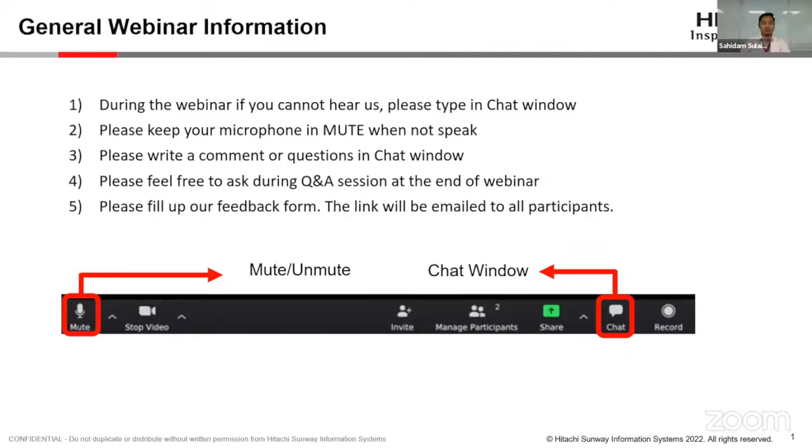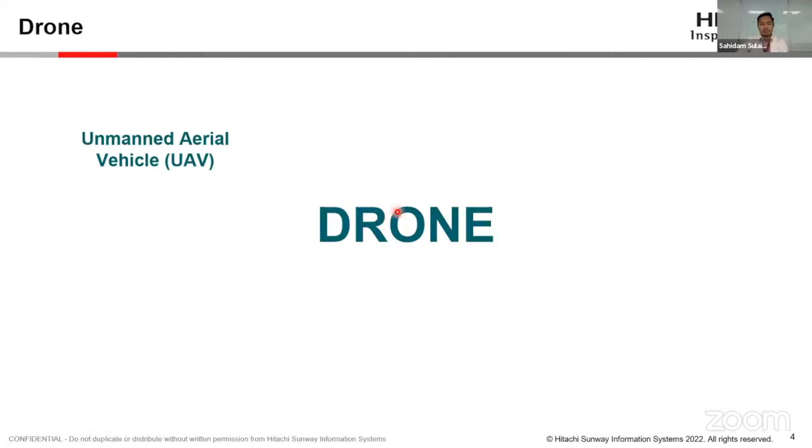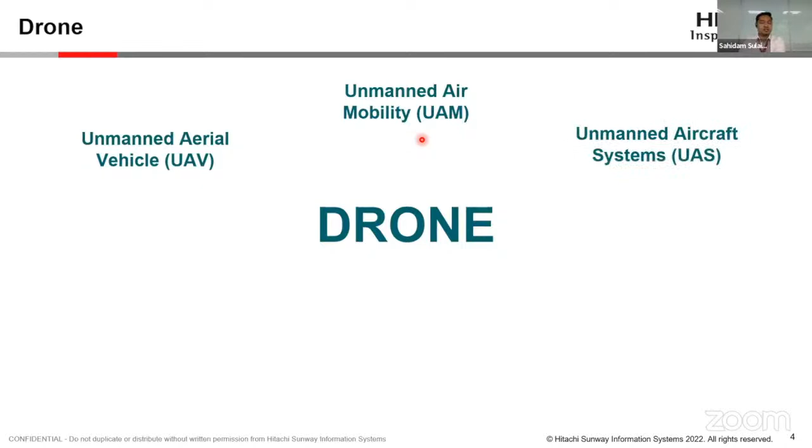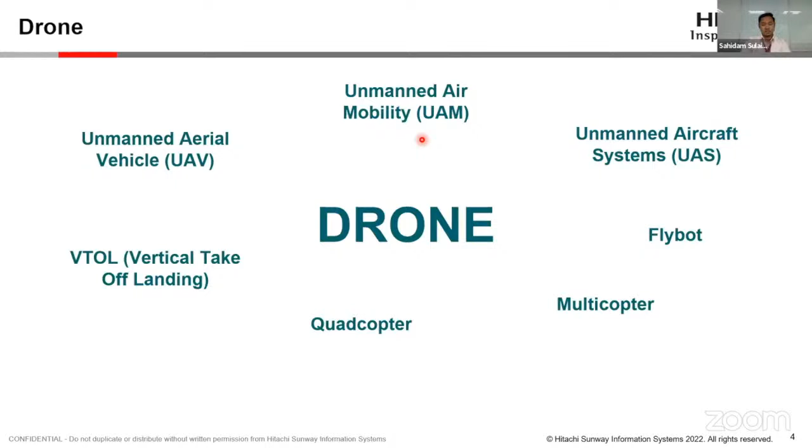Okay, firstly, when we talk about drones, it's just the normal term that people use, but they're also known as unmanned aerial vehicles, UAV, or unmanned air mobility, say when used for transportation, delivery and so on. They're also known as unmanned aircraft systems, flybots, multi-copters, quadcopters, and also VTOLs. These are standard terms representing the drone, and the actual abbreviation for drone is dynamic remotely operated navigation equipment.

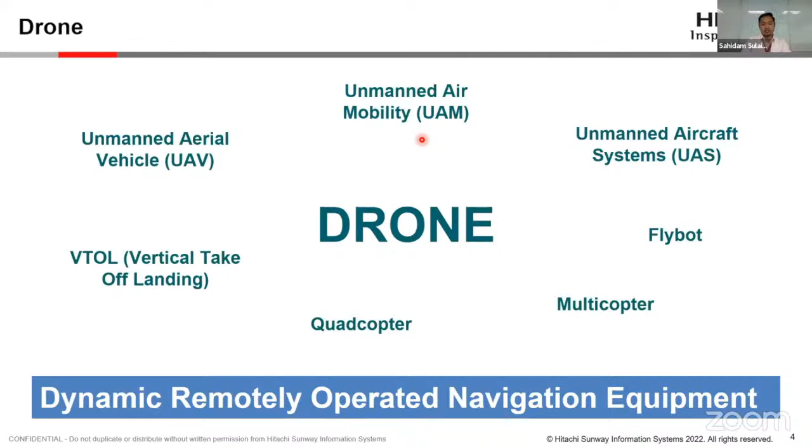So in the 90s, drones were used for military purposes, for research, surveillance, and even for filmmaking. But starting from the 2000s and moving forward, the technology improved, and drones will be used for transportation, human transportation like air taxis, passengers, and so on. So in this webinar, I try to focus on passenger drones as well as the system simulation related to that. But before that, let's see how the drone innovated throughout the years.

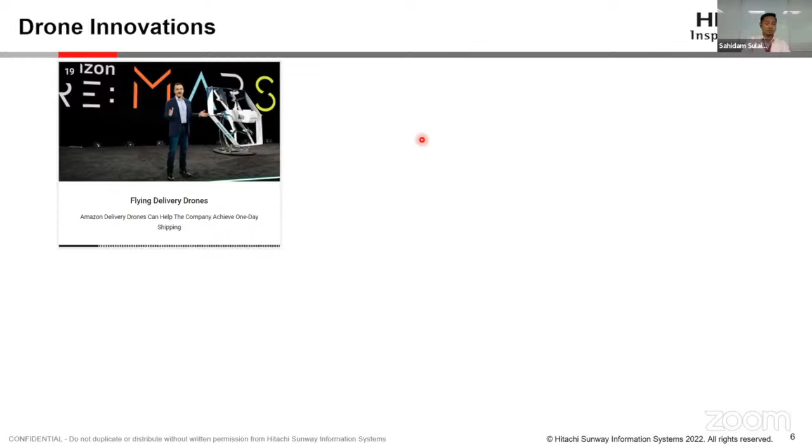So it can be used for delivery drones, which have been around a long time, like Amazon, which uses drones to deliver their products in one day. And of course, it's useful in the agricultural industry, like pesticide spraying drones, used to spray pesticide on plants. Other types of delivery drones deliver food, and they even use drones to deliver medical supplies to urban places.

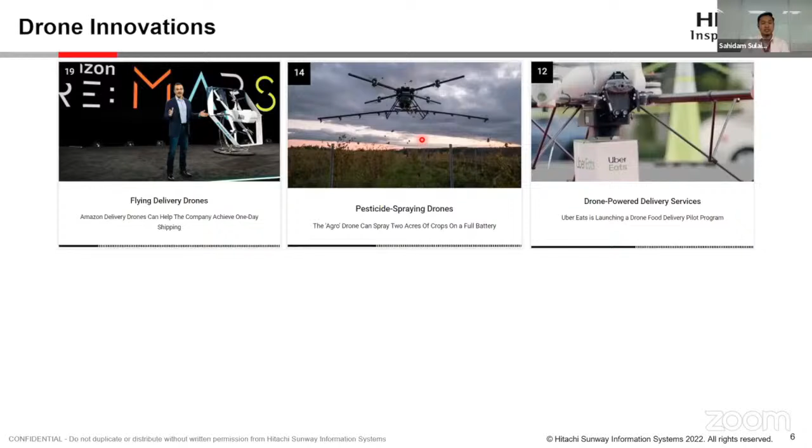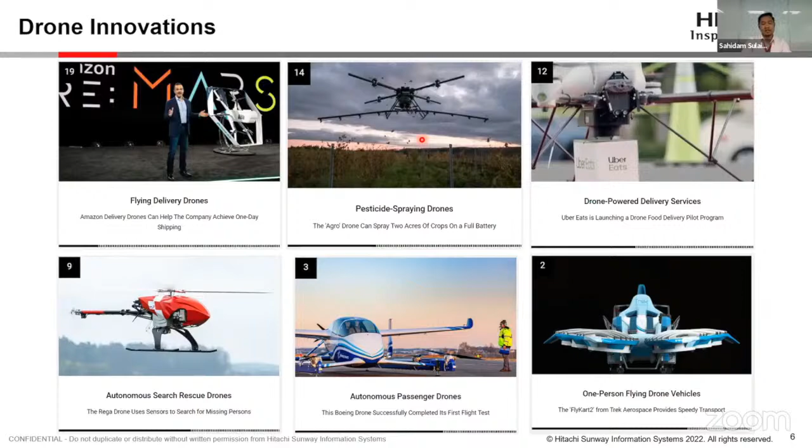And one of the innovative uses of drones is autonomous search and rescue drones. When you have earthquakes or floods where it's difficult to reach, you use a drone to find the victims so the rescue teams can go to that location. And now the trend is moving towards autonomous passenger drones or one-person flying vehicles. This is the real challenge we are facing right now: how we can validate and check the performance of our passenger drones. So we try to see how simulation will help overcome these challenges when designing or validating the performance of drones.

So as we can see now in the market, this is courtesy of Porsche Consulting, we see the trend for these passenger drones. Starting in 2025, air taxis, intra-city and also city to city. And for electric vertical takeoff and landing drones in 2035, there will be about 23,000 units, and the market at that time will be 32 billion. So in the future, they are trying to produce passenger drones. Even the certificates will start in 2025, so right now we have to start the design.

Okay, so the design should start now, because we need to cater to all types of challenges and problems, and of course we need to meet the certifications. Same as with road traffic, for air traffic you need to have air control as well. This market for passenger drones will attract a lot of capital, and from the proof of concept, we will use simulation to optimize the design of the drone for actual operation.

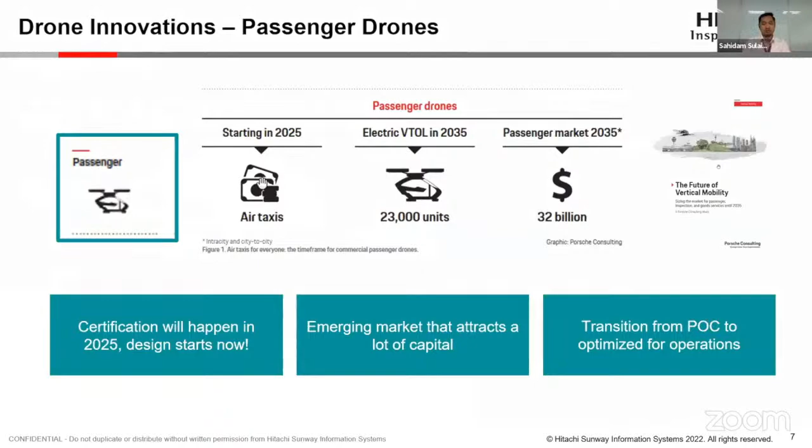Okay, so we see a few challenges that can be faced while designing these passenger drones. Of course, this relates to the design itself, where you have the propulsion system, normally electric, related to power and energy density. So if you want more power, you need a lightweight frame. These are parameters you need to consider when designing drones. The same goes for thermal or energy management, how innovative your airframe design is, and whether the flight operation is fully automated or semi-automated. And you need to make sure the design can be accepted by the community, in terms of the sound of the drones.

And of course, if these are passenger drones, you need to make sure that the end-to-end passenger experience is comfortable. They feel safe when they ride these passenger drones. So these kinds of challenges we have to cater to before we proceed to fully utilize the drone as a passenger drone. And of course, one of the important things is how we can verify our design, how we can get verification and also get certification for that.

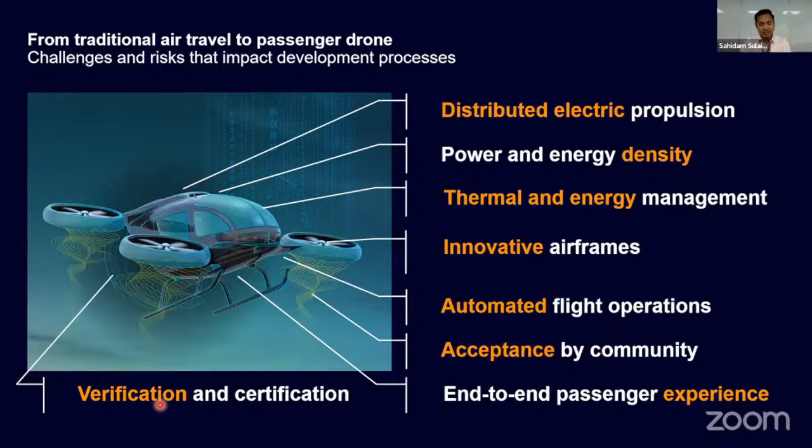Okay, even if we want to fly a drone now, we need to have drone pilot certification. If not, you have to go to jail for like 5 years. Okay, so how will simulation help to handle this? For that one, we will discuss throughout the webinar.

Okay, so here the simulation, as I can see from the poll right now, most of you guys are not really familiar with simulations. So actually the simulation is engineering simulation, where we do the simulation for the actual prototype, but this time we use computer power to make all the simulations or analysis related to the product that we want to design. So I'll just give a quick overview of this simulation, or the engineering term for this is computer-aided engineering, or CAE. I think most of you are familiar with CAD, CAM, and CAE is basically one of the portfolio for PLM products, or product lifecycle management.

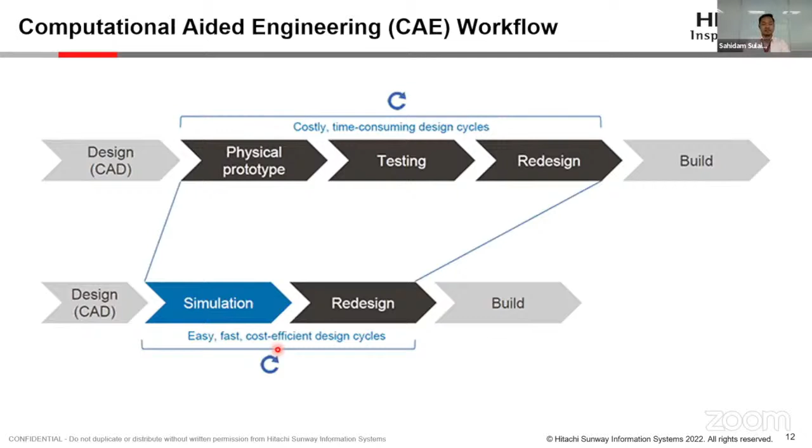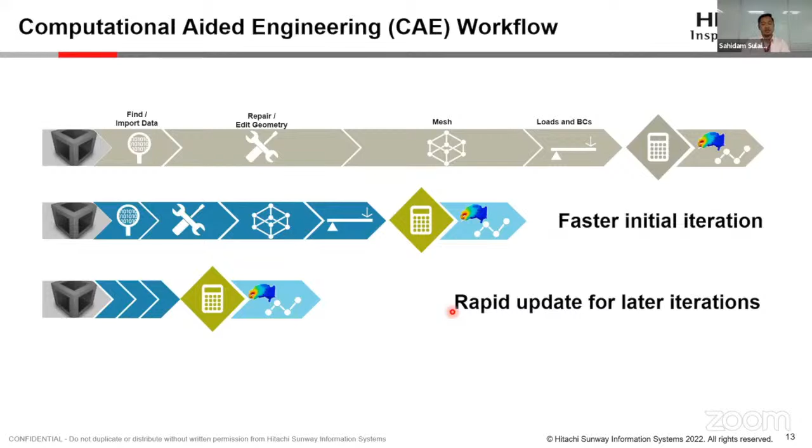Okay. So what if you have tools that can do design exploration? So this is a standard workflow. You have the workflow for CAE analysis. But if you can see from the bottom workflow here, it's a rapid update, meaning that you do design exploration in your study, because we want to innovate. Okay, we want to have innovation in our design. So we have to be in front of other competitors, and if we want to produce new components of the drones, then we need to be more advanced than them. So these tools will help to find which design can optimize the usage of the drones, which I can cover later. Okay.

So let's take a look at the first simulation that I want to share with you guys, which is aerodynamics. So when we talk about aerodynamics, it's related to the air flow, the flow velocity, the wind, and so on. So it can be internal aerodynamics or external aerodynamics. Okay, so when we focus on our topic today, which is drones, the most important component related to aerodynamics is the propulsion system.

Okay, so now the new concepts of propulsion can be either multicopters, or the common drones that we can see nowadays, quadcopter types of drones. They have 4 rotors. Okay, and then there are many drone concepts. If you search Google, you'll find more types of drones on the market. So here for this webinar, we try to focus on multicopters and also quadcopters for the simulations.

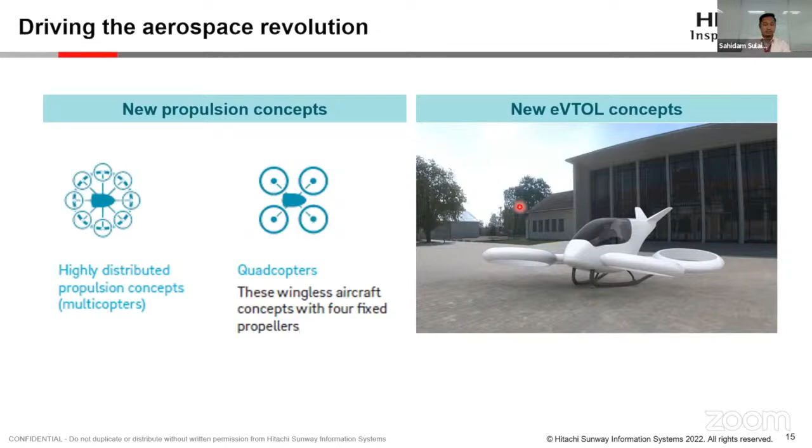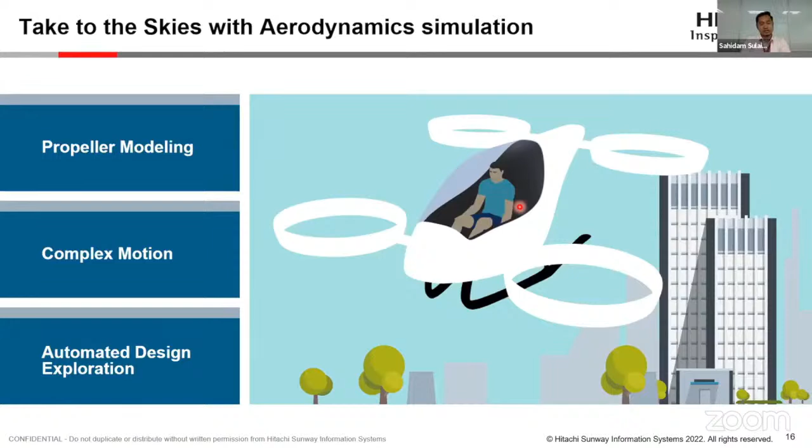Okay, so when we talk about the propeller modelings, if you have a few propellers, only 4, then you need less time to do the simulations. So depending on the number of rotors that you have, this will affect your simulation time. For example, you can see at the bottom side here, you have around 8 rotors, which means that you need to do the simulation for these 8 rotors in your analysis. Compared to the 4, maybe you have less information needed to run the analysis. So this type of drone will affect your calculation times. More rotors means more time to solve the analysis.

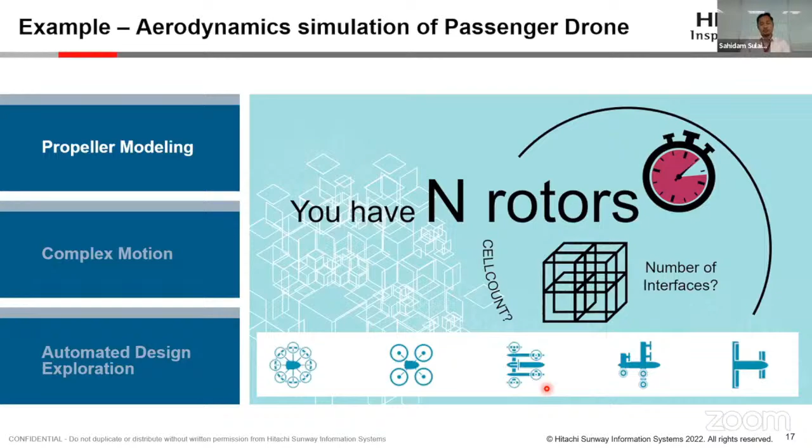Okay, so with the help of simulation, there are a few methods that you can use to study or to model the propeller. For example, in this case, we have blade element methods, and you can see from the animation how the propeller behaves, how the propeller rotates. But in actual fact, these are not modeled physically. You don't have any physical rotors. It just needs you to define the number of rotors and the parameters of the rotors, for example, the thickness and the angles of the propellers. Once you have all the information, you just key that information into the analysis, in this case a CFD analysis.

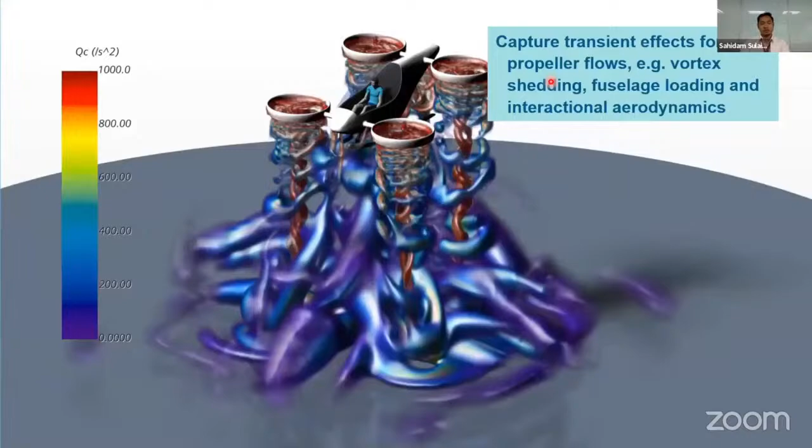So it can capture the transient effect of the flows, vortex shedding, which is important when you want to deal with the sound from the propeller movement, fuselage loadings, and also how it interacts with the aerodynamics. You can also plot the isosurface of this analysis to see the rotor positions in the simulation. So you can see here, basically, it is not the actual rotor. It's not the actual geometry. It's just based on the methods we use in the CFD tools to capture the angles, the thickness, how many blades you have for that propeller, and the diameter of the rotors. From there, you can study the best configuration of your design to have stability when you launch or land the drone.

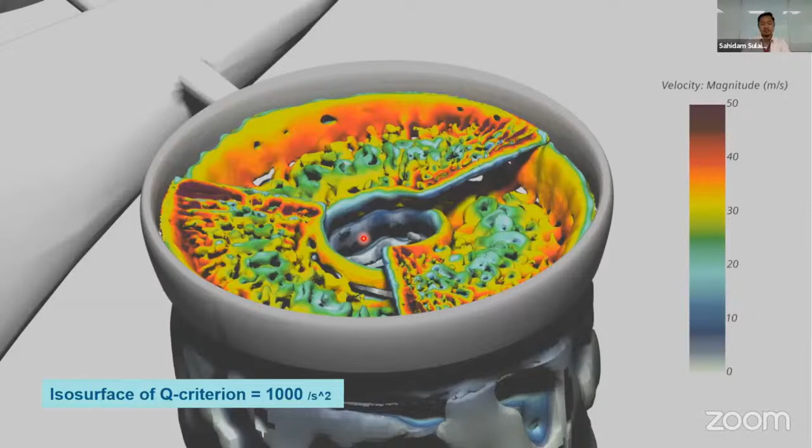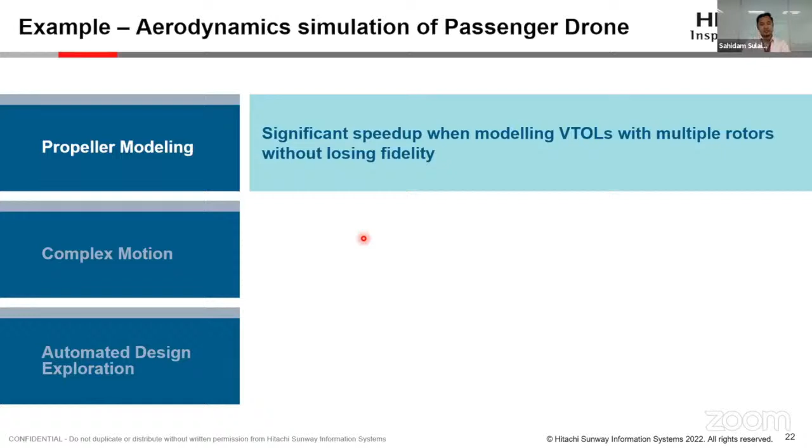So these tools will help you speed up your modeling of VTOLs with multiple rotors. You don't have to worry about how many rotors you want to use for your drones. As long as you use simulations correctly, you will gain the results without losing the accuracy of your simulation. So this is one of the important items for CFD.

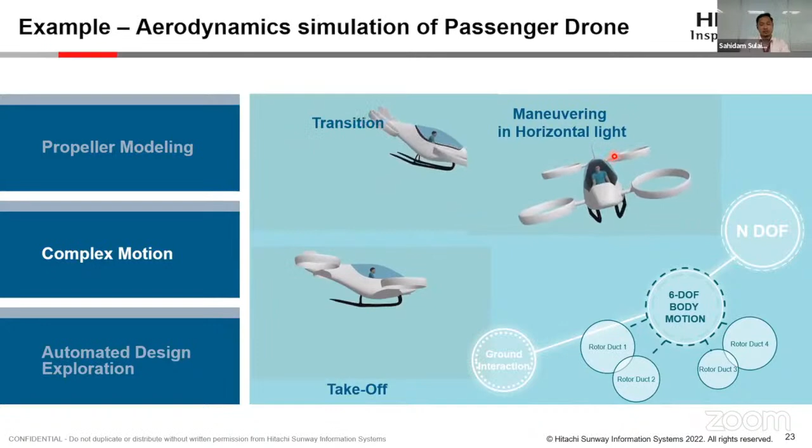But don't forget about the motion. When we talk about the aerodynamics of drones, we want to make sure how the drone behaves during takeoff, and how it transitions from vertical motion into horizontal motion. And of course, you want to know how the maneuvering system works when you start to maneuver your drone. This also can be done inside the CFD tools. So you can see from here the takeoff, the transition from vertical to horizontal, and then the maneuvering in the horizontal.

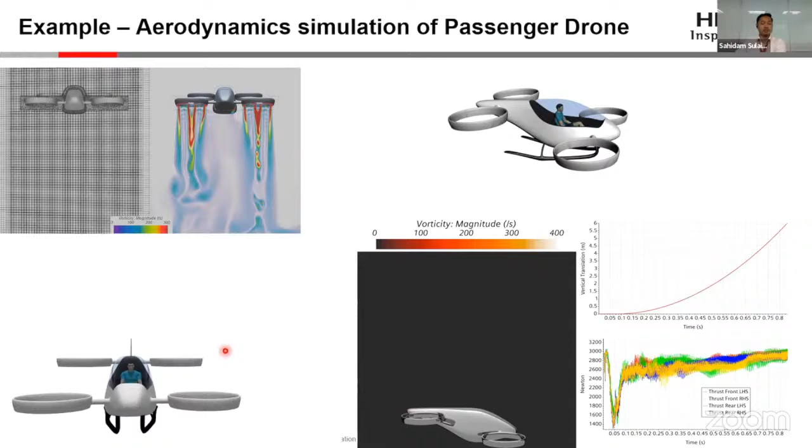If we look in detail at the simulation, this one is the vertical takeoff. You can see the vorticity magnitude, the streamlines, and from the results or the contours, you can control the best configuration that can make the drone stable. Same thing for the maneuvering, you have more control over the flow around your propellers, so you can optimize your design. And this is the transition from vertical to horizontal.

When you are talking about simulation, this is related to the meshing, the number of elements. So you can see here for these 4 rotors, you already use quite a lot of elements. Imagine if you have 18 rotors, like Volocopter, which has 18 rotors. If you want to simulate it using a standard CFD process, it can take up to a week or even more to complete the analysis. That's why some software has tools that can simplify the methodology in performing the CFD analysis. Same thing, you can see the plot, the contours, the animation. You can also gather the information that you need.

At the bottom right corner, you can see the thrust information from each of the propellers. You can plot this thrust and make sure you have the optimum thrust to ensure your drone can take off vertically. So these are the important information that you need from the CFD analysis.

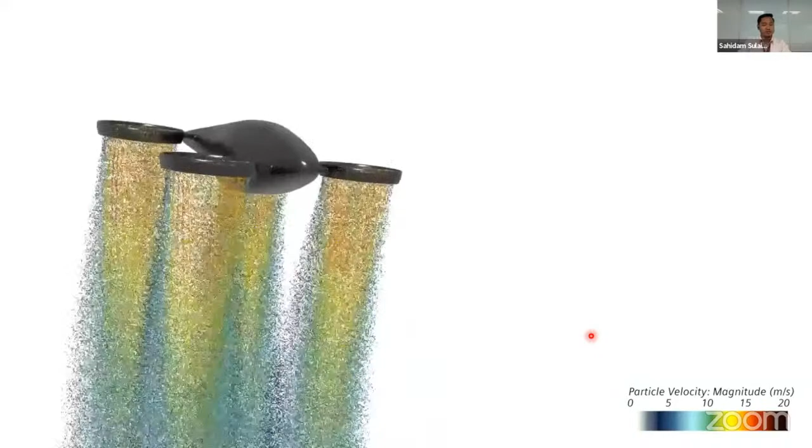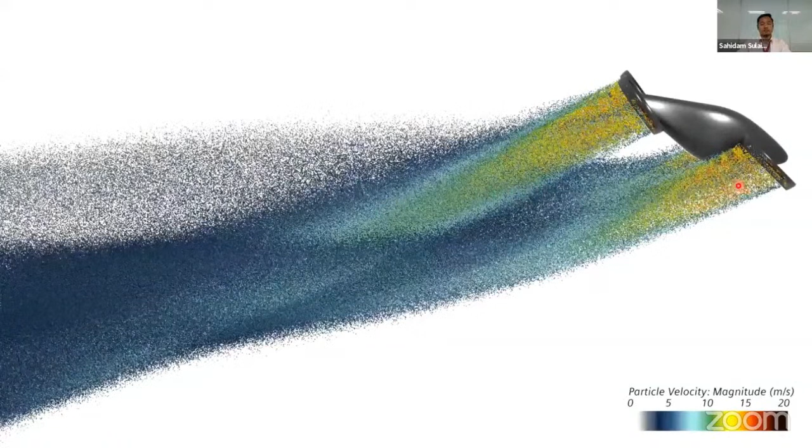Once you combine everything for the motion, you can see the takeoff, the transition between verticals and horizontals, and if you do maneuverings, you can see how the flow behaves around the propellers. So this is one of the post-processing visuals that you can see from the CFD analysis.

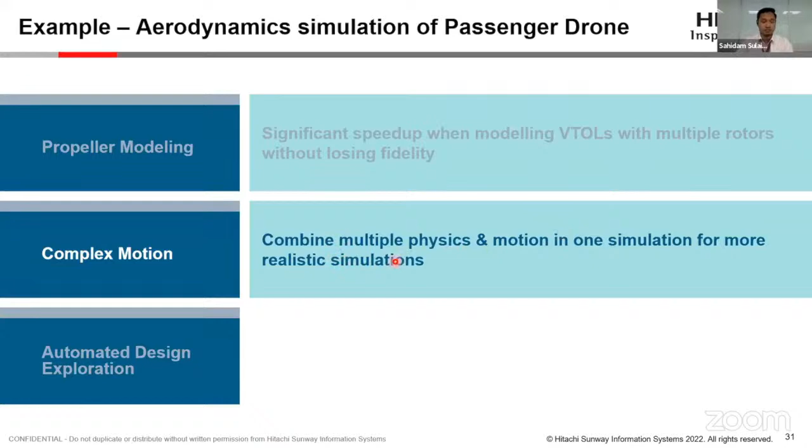For the complex motion, it can handle multiple physics because, as you saw from the previous slide, you have the CFD part and then the motion part. So this is considered multi-physics. You can see how the motion affects the flow, and how the flow affects the motion. These are more realistic simulations nowadays, and many software have these tools.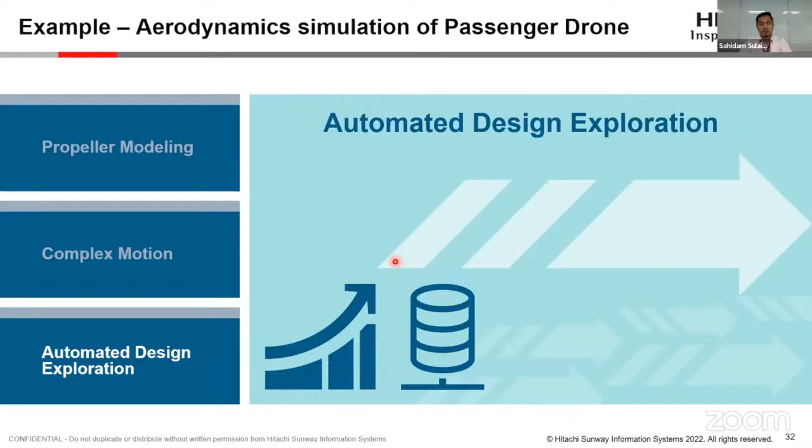The most important part when you want to be innovative in drone design is having design exploration tools. This will help you find the best prototype, the best configuration of your drones.

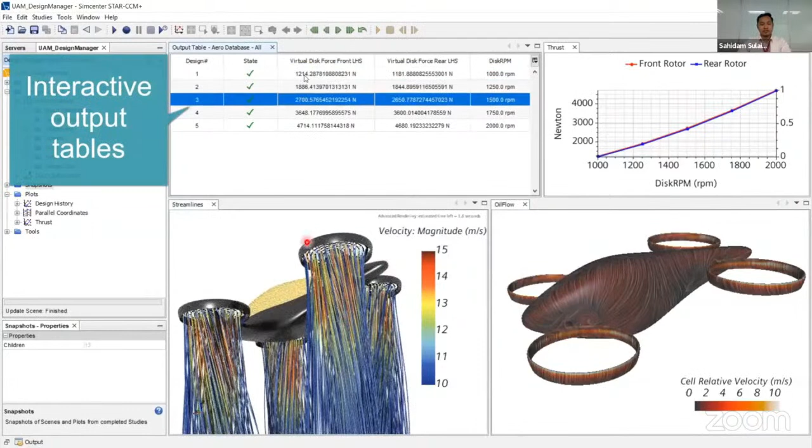For example, in this case we have different parameters that we want to study, such as different rotor parameters: the diameters, the blade numbers, the angles. Using these design explorations, you can find which combination is the best with the minimum thrust, or even minimum number of blades that you can study from the analysis. It depends on how many parameters you define.

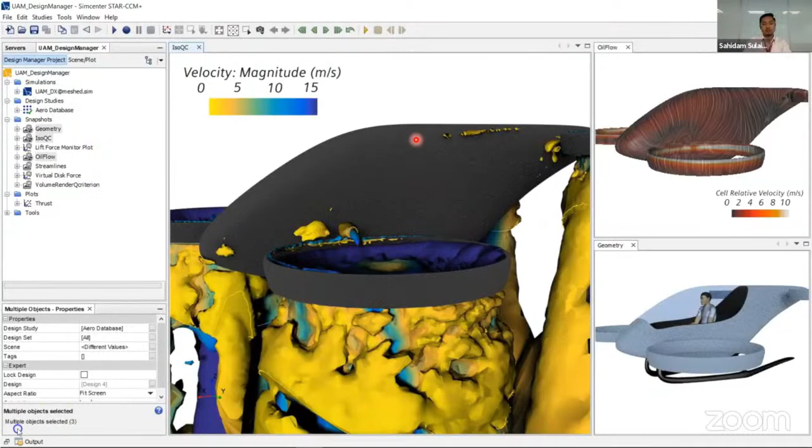It will take time sometimes to solve, but it's worth it compared to the traditional way of doing things, where you need to build physical prototypes. Each time you change a design parameter, you'd need to build another physical prototype, which is costly. Using these simulation tools, you can study as many designs as you want and display the results. Once you find the final best design, then you can proceed to produce the physical prototype.

That was talking about a few parameters, but let's say you want to move further for better designs. You can use the design exploration tools. For example, here you can see there are 9 variables for the drones, like the NACA profile thickness, the propeller diameter, RPM, the angles, height, and so on.

The tools will help you find, based on the objective you want to achieve from the simulation, the best candidates using design exploration. You can see from the animation here how different configurations give different plots. From there you can study what the most important parameters are that you need to change before you get the results you want.

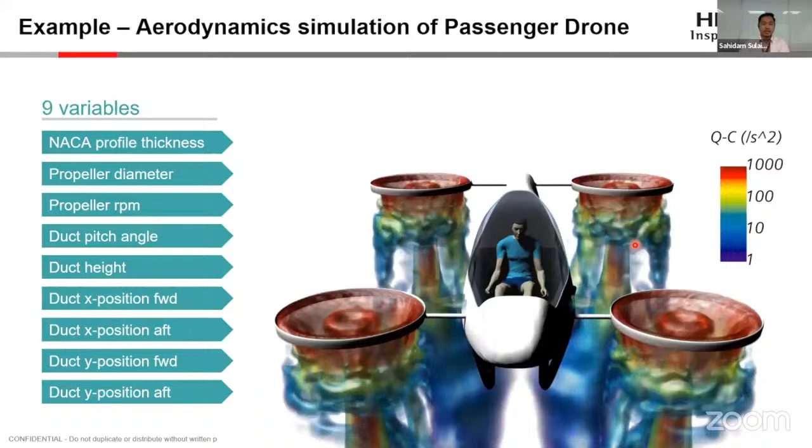So here are the optimization tools that software have. Now we are using Star-CCM, one of the CFD tools. Basically you can set your goals; let's say you want to minimize the power for the thrust.

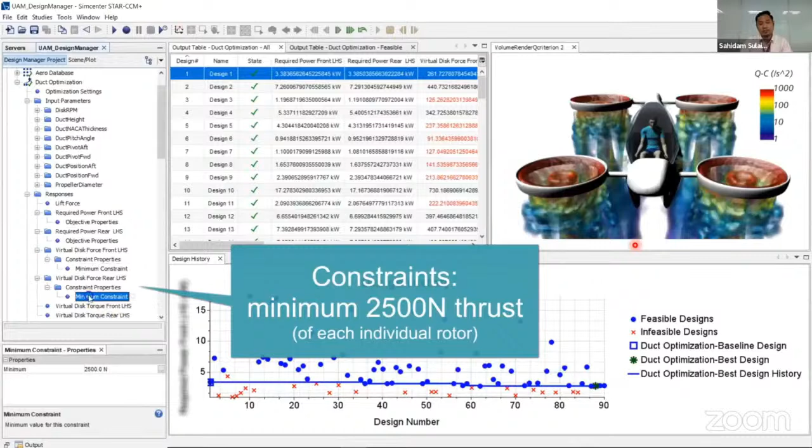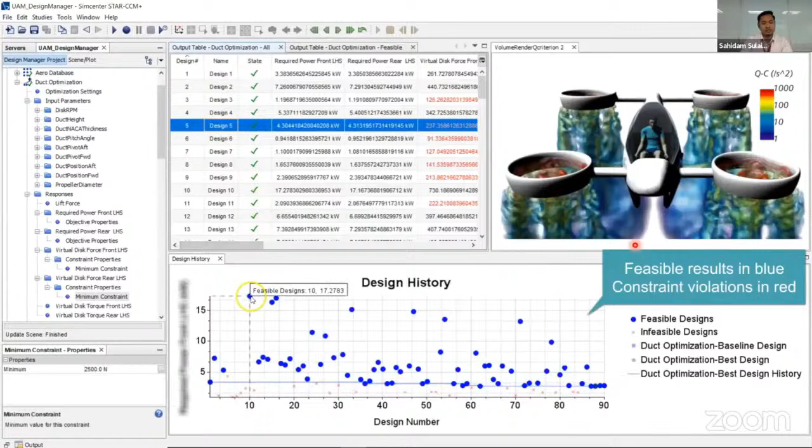You need to make sure each of the rotors have a minimum thrust, like 2500 Newtons of thrust. Using these exploration tools, it will run all the parameters in the background, and you can see a lot of feasible designs. Feasible design means a design that meets all the requirements, and unfeasible means a design that fails a certain criteria. From here you can choose the best design.

So here is design number 88, and then you can study the parallel coordinates, plot the contours, and plot the cell relative velocity. This tool will help you be innovative—you just choose the best design instead of producing all the prototypes for each design. You can see all the variables and which variables affect the thrust the most.

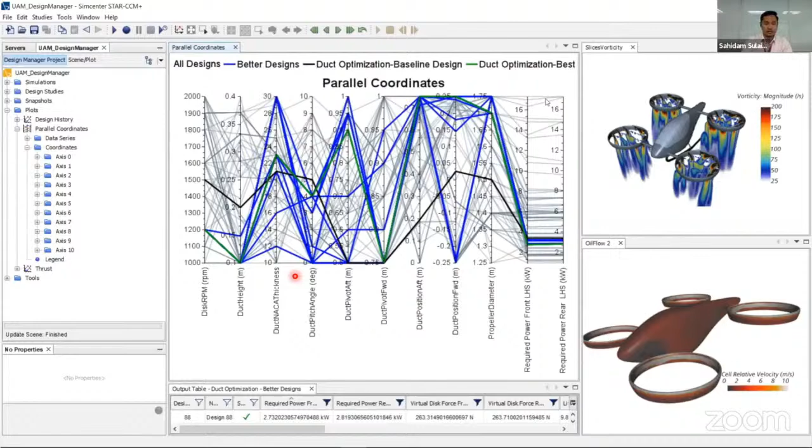This tool will help you be innovative. The design exploration will save money, and you can analyze a few thousand designs in one shot. You don't need to make another design to achieve that.

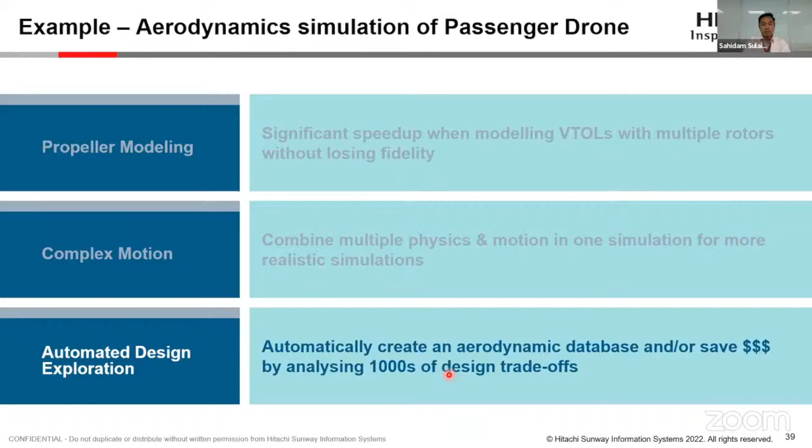So that covers the aerodynamics part. As I mentioned, another important simulation type that drones need to cover is acoustics. Once we mention acoustics, based on the definition it's the study of compressional waves, which in layman's terms is related to sound.

Okay, it's related to the sound. The sources of the sound can be from vibrating bodies, or even coming from air turbulence. If you can see from this blade here, the rotation of the part will give the sounds. And then the propagation of that sound may be through the air, through the structures, or a mix of both.

And then here the receiver is basically, in terms, we call it a microphone, or it's actually our ear - how we receive the sound from the sources.

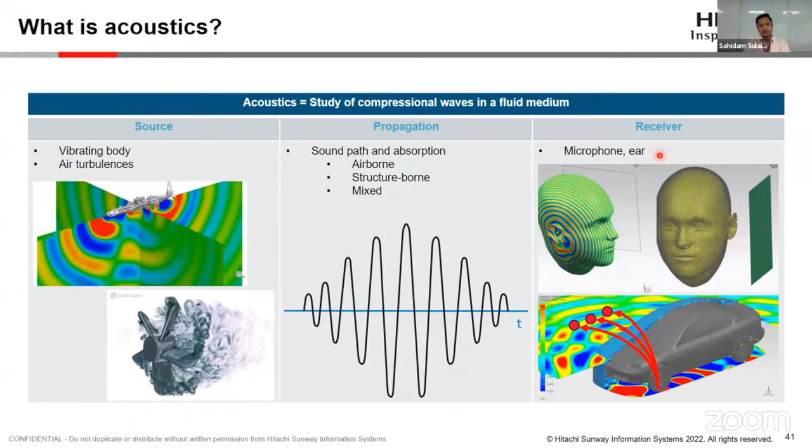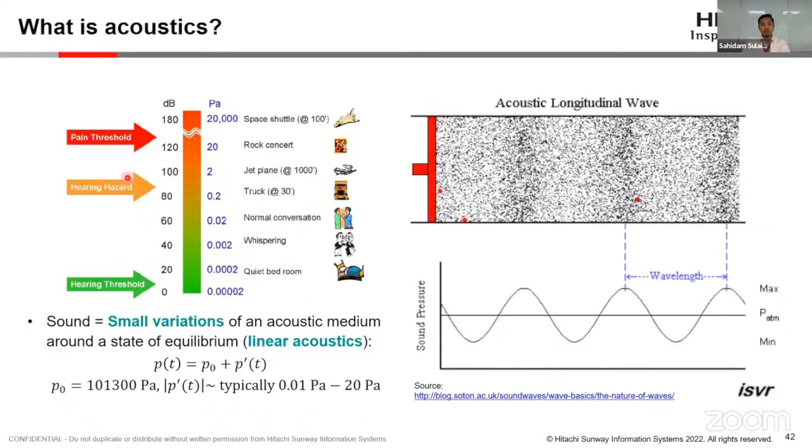So why acoustic is important in drone design is that you can control your sound when the drone does deliveries, or even for the passenger inside - you can know how many decibels they can take. That's why you need simulation tools to study the acoustics of the drones.

Just a quick information sharing on how the acoustic analysis can be done. You basically need to model the parts, the drone part - this is an example of a delivery drone. As you can see, the drone itself has 4 propellers. In this case, the propeller is not designed because some of the software has tools to generate the profile of the propellers virtually.

If you can see from the bottom side here, this is the CFD analysis of the propellers. We will use the results from these propellers and transfer them into the structure part. Once we have all the information together, we can do the acoustic analysis. So we can see the propeller is rotating, even though we didn't have the actual propeller. This is how the simulation will help you achieve design innovation.

Let's say, from the design itself, you can plot the acoustic pressure, the directivity plot as well.

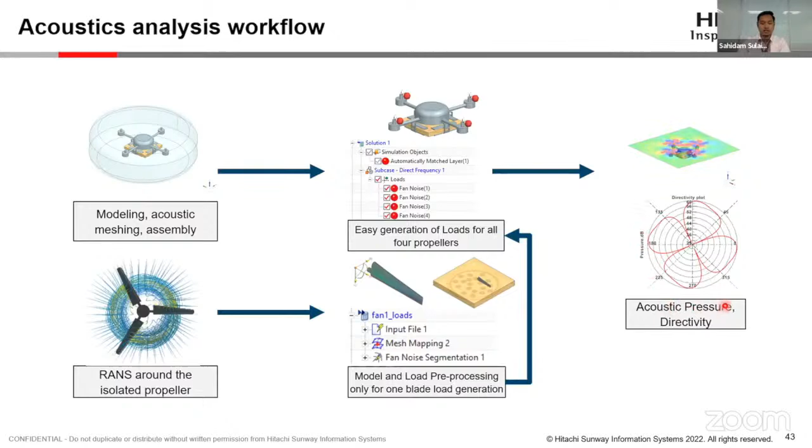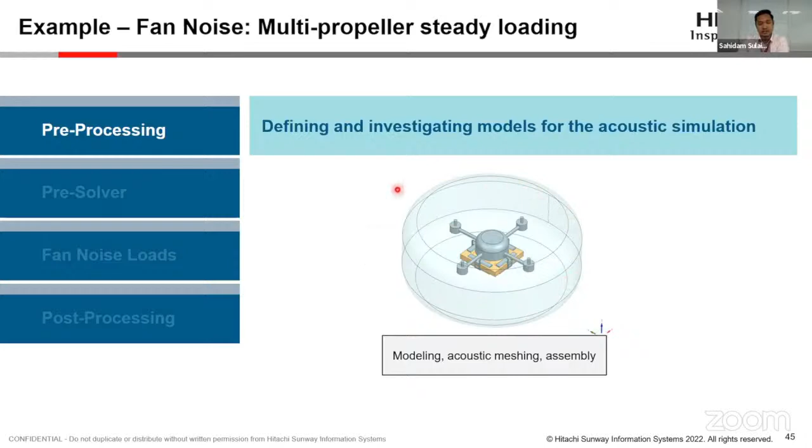In detail for this part, let me run through it quickly. You have pre-processing where you need to define the part itself - the drone, and then you have this big cylinder here. This is for the acoustic area, meaning you want to have the propagation from the propeller to the location you want to check or measure. So you need this cylinder part here as your acoustic volume.

And then of course you need the information of the blades - for example, you run CFD simulations, or you can get actual data from real testing. Once you have that data, you can import it into the simulation tools, especially for acoustics, and do the mapping. Basically, the software will convert the pressure from the CFD analysis into force data, which can be read by either acoustic or structural analysis - both are possible.

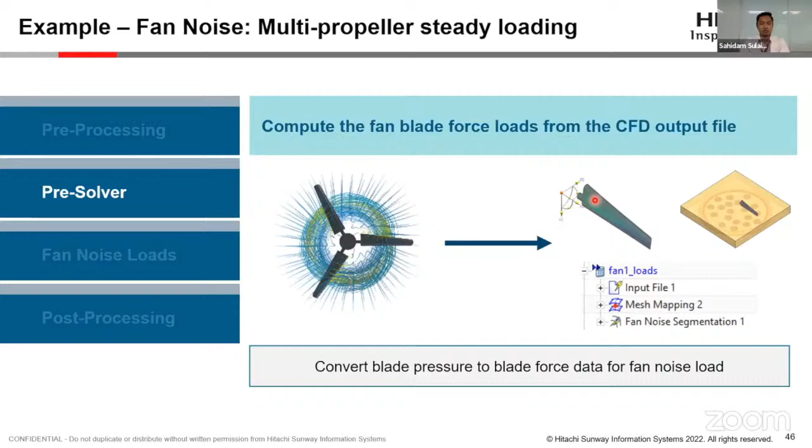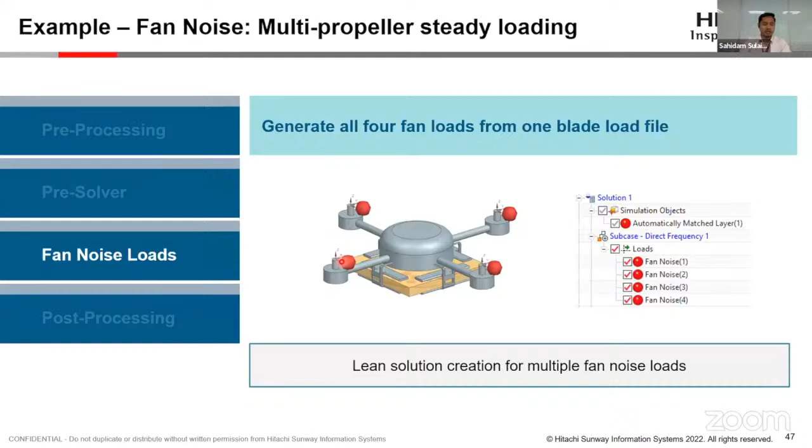The noise load that you get from the CFD or actual testing, you can map into each position - so you don't have to have the actual propeller, you just need that information. Once you complete the analysis, you can get this type of results.

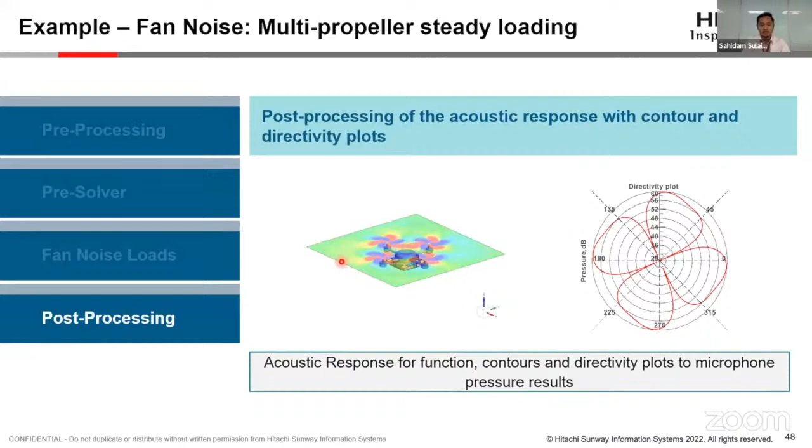Let's see a quick video on how we can view the results of the acoustics. Every software has post-processing tools where we want to see the plot of the results. Here we have groups of the plane, which is the microphone plane - this is the level we want to measure. If you want to measure in a different location, you need to generate another plane.

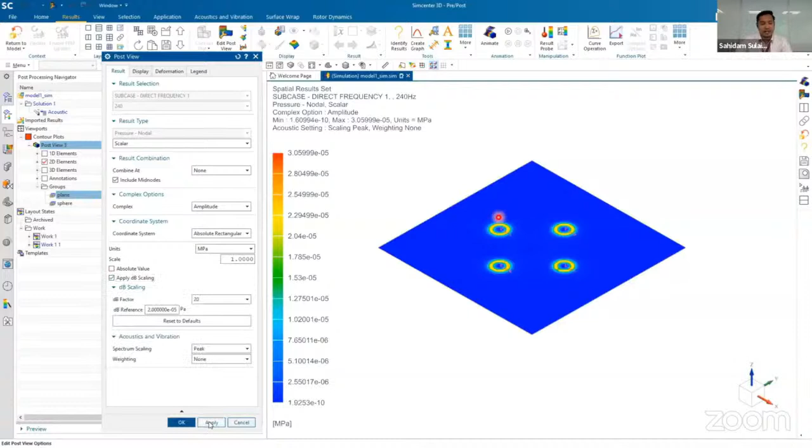And then here we can put a scaling based on the decibel, and you can play the animation as well to see whether it's correct. So you have all the results, the decibels, and you can play around with the post-processing tools to plot how the animation of the products looks, the acoustic levels. For each of these acoustic results or plots, you can compare with the contour here.

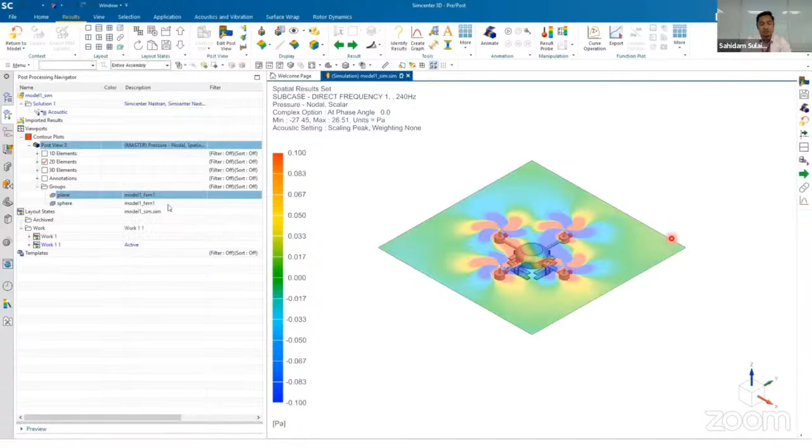So you have this type of rotation around each of the propellers, and then you see the location of how the noise is distributed from the sources, and you want to make sure that each location maintains under the threshold. So this is how simulation helps in designing acoustic performance.

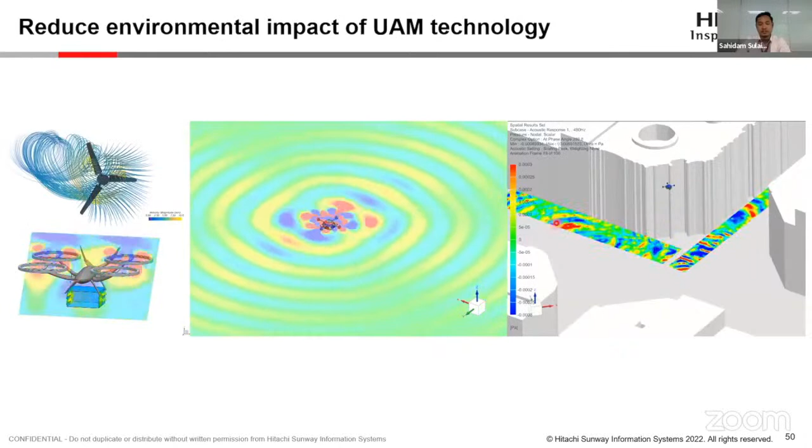If you want to go further, you can do ray acoustic simulation. This is an example done by Brazil, where they have delivery drones and want to make sure the sound pressure level doesn't affect the ear levels of passers-by. So this can be done as well.

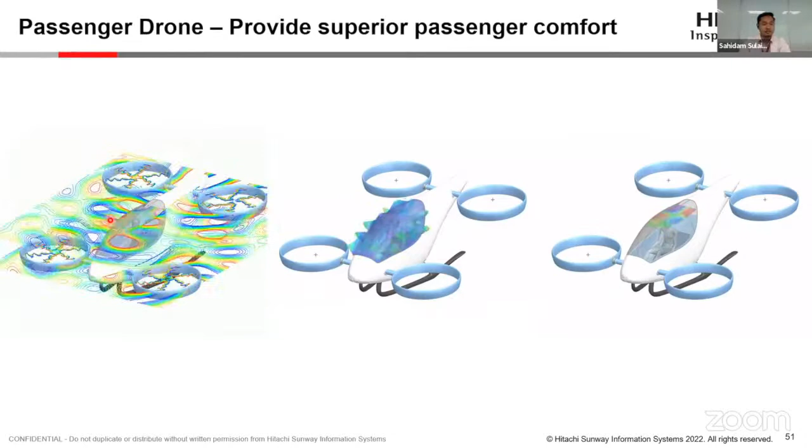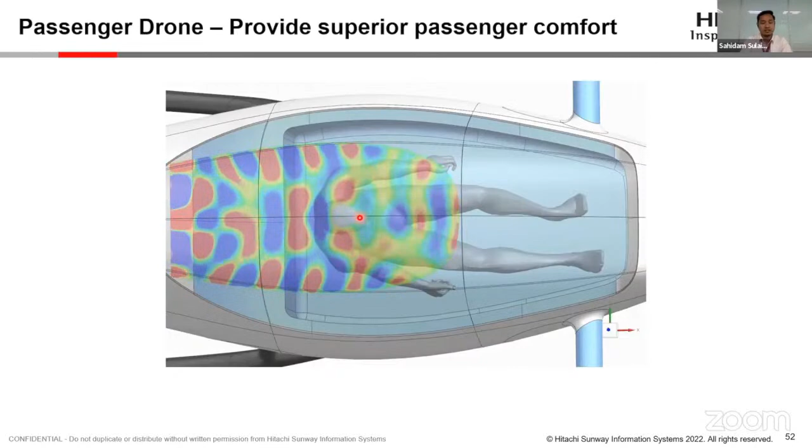And earlier we talked about passenger drones, right? So we have this information as well. You can plot the acoustics around the passenger itself, and see how the sound wave propagates from the propeller to the ear of the passengers. This helps you decide how to control the propeller and what design is best to make the passenger comfortable inside their compartment.

Finally, I'll share with you about system simulation. It's a bit different from the first two simulations I talked about earlier, aerodynamics and acoustics, which are more 3D types of simulation. System simulation is a 1D type, which is also important when you want to verify your drone design. Before that, let's understand what a system is.

A system is basically a group of multi-domain or multi-physics elements. If you remember, we talked about domains: electrical domain, control domain, hydraulics, pneumatics, and thermals. Same thing for physics, we have structural dynamics, thermal physics. Once we have all of this together, it becomes a system.

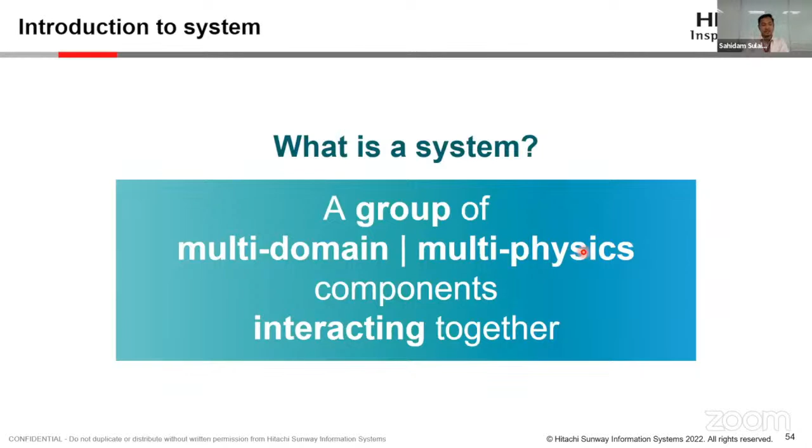Now, if you look at simulation tools around the world, how do you want to connect a 3D simulation, how do you want to connect the electrical part into the CFD? That will be a big challenge to the analysts, to the companies. That's why we call this system simulation, to combine all the things together.

Just take a look at the hybrid vehicle example. To produce this hybrid vehicle, you have to have the control system connected to the electrical system, then you have hydraulics in terms of the absorber, a mechanical system, a thermal system. All of this needs to be connected to ensure the performance of the hybrid vehicle.

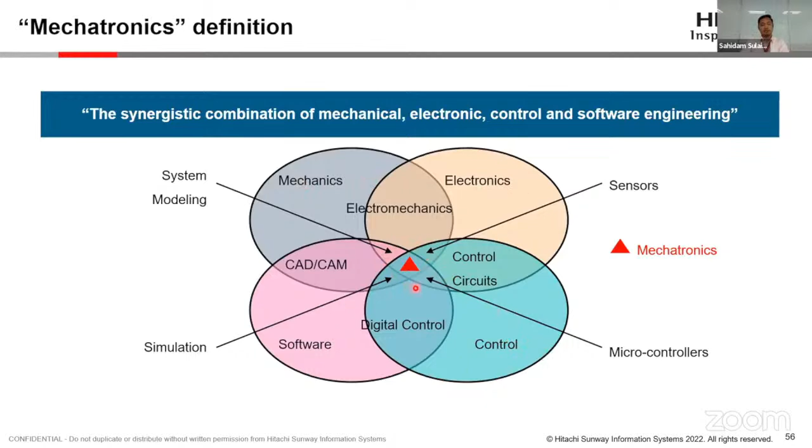The combination of all this is called mechatronics. If you look at the graphic here, it consists of software, mechanics, electronics, and controls. The thing at the center is the mechatronics we want to discuss related to drones. A quadcopter drone is the perfect example of a mechatronic system because it relates to electrical, mechanical, as well as aerodynamics.

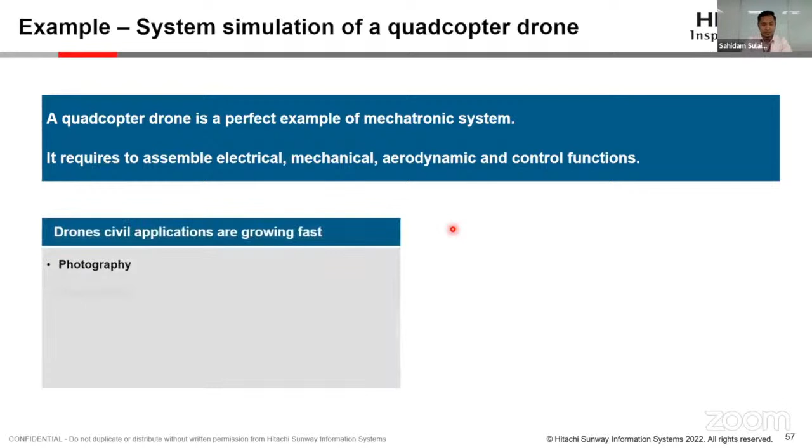So these are some applications for drones, and what's the effect of the parameters we define for this drone system on our flight times. What's the stability? What's the max payload that the drone can satisfy when you design this type of drone?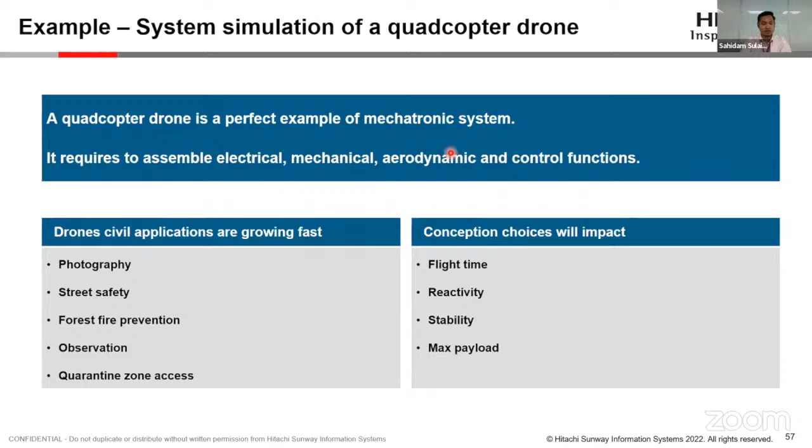So these are examples of the drone system. You have a control system for the electronic speed controls, the controller, electronics and electricals. You have electromagnetics, antenna, the communication between the drone and the pilot, and also the mechanical and aerodynamics of the propellers. So it is a system that you need to make sure is working perfectly before you launch.

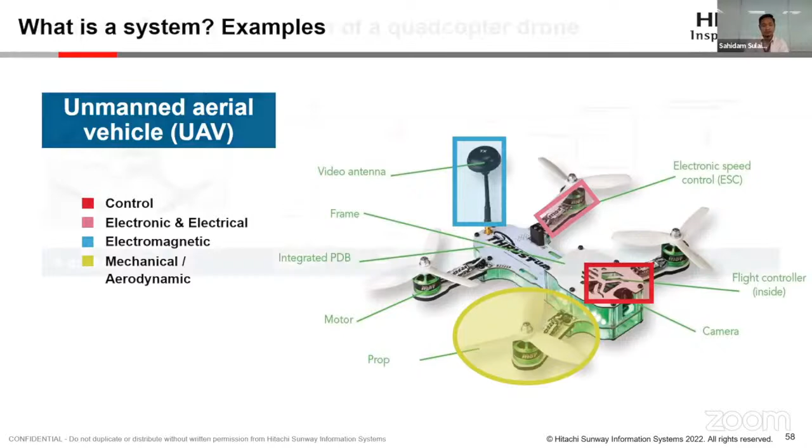So here is the quadcopter, the physical quadcopter. Once you want to convert it into a system, you need to have this type of components. A quadcopter is a moving system. You have the component for the quadcopter inside the system, and it moves by propellers. Each propeller, here we have 4 propellers, we need to define 4 propellers for that.

Then these propellers are controlled by mechanical and electrical motors. Each of these has a mechanical part and electrical motors. Imagine if you want to do this inside a 3D simulation, it is almost impossible, but it can be achieved by system simulation. This is basically done before we have the physical product, meaning we do the system simulation first, get all the results, and from here decide what is the best parameter for our actual drone.

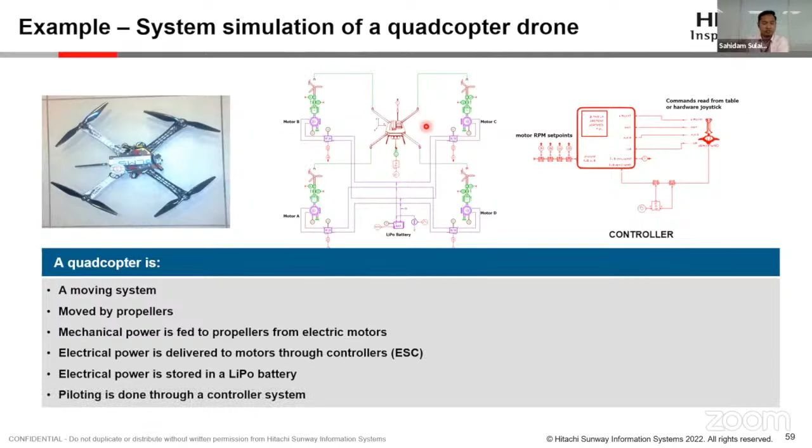Okay, and then we have electrical power that is controlled by the controllers, and then it will be powered by batteries. So this is the connection that we are talking about: multi-domain, multi-physics. You have electricals, you have mechanicals, and then you have a control system that can control this quadcopter. And then we try to focus on the drone itself.

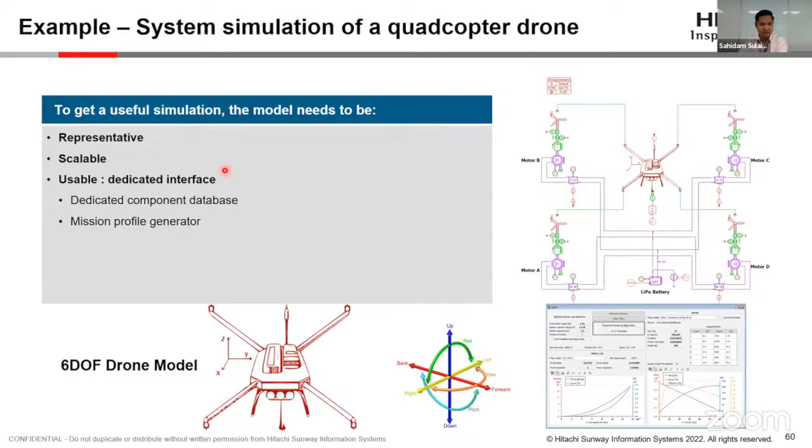What is the information that you need to ensure this system is good, or to validate your drone design? It needs to be representative, scalable. You need to have the interface to validate the data, like the plot, the animation, and so on. Okay. So this system simulation will have some tools to get the optimized structures. As you can see here, you have the parameters.

For example, you have the drone weight around 1.2 kilos, and then you have this battery size of 12.45 volts with the 3.3 amperes, and also the number of motors. So for each of these parameters, you want to make sure that the propellers and also the motors will give the optimized flight time. By the default settings here, the flight time of this drone is around 11.5 minutes.

So the software or the system simulation will help you to optimize the flight time by playing around with this value here. And then you have the propeller models, and also you have motor models. So the software will try to find the best combination that can maximize your flight time. In this case, we have this maximized autonomy. And here we are using Simcenter Amesim. Amesim is a tool from Siemens.

Okay, so once we run the optimization, you can see the parameters of the propellers and also motor are changed. And from here, we can decide what type of propeller models you need to use, what motor models you need to use to achieve this flight time. Even if you don't have the motors, you will still have the information, like the thrust factor, the thrust exponent, the power factor, and also power exponent. Same thing for the motor.

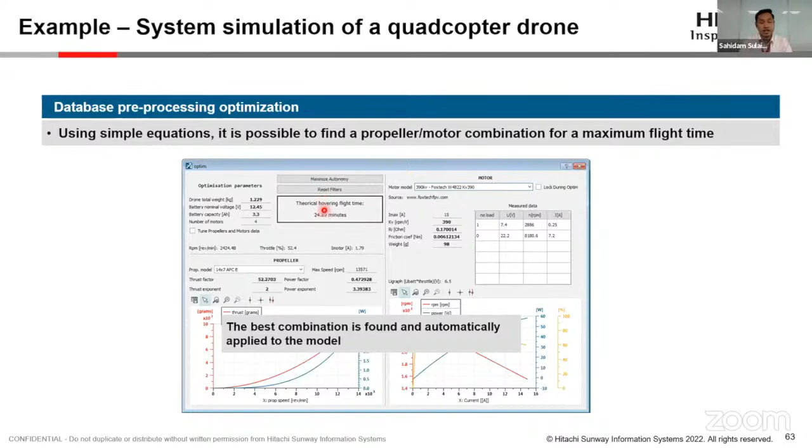You can find almost similar parameters to this, so that you can achieve the maximum flight time of your drones. So this is how system simulation will help you in your design process. Okay.

And of course, the system simulation has all types of post-processing like plotting. Let's say you want to see the current consumption during the flight. You want to see the propeller speed, each of the propeller speeds. And even you want to see the state of charge of your battery. So this is in seconds.

So if you run it in the transient or actual time, you can see how the battery drops. And you can estimate, for this size of battery, how long the flight of the drone will be. So it will help you to decide which parameters are the best for your drones.

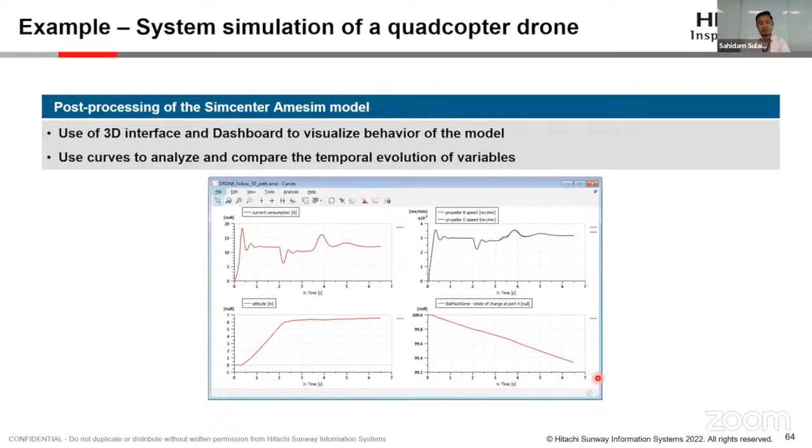Another example that I can share with you is also prepared or designed by using system simulation, for detect and avoid. So normally the system simulation will look like this. You have the electronic system or domain, you have control domain, you have mechanical, you have propeller, and then you can input some images for the display.

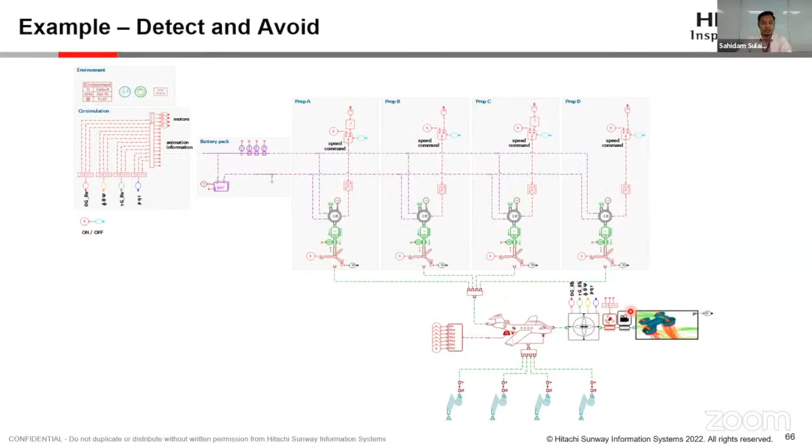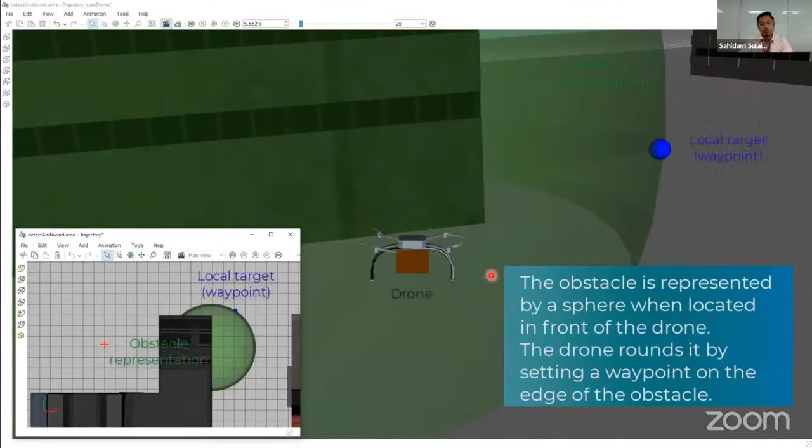Okay, so how it works is that it's a drone autopilot, how it detects and avoids the obstacle. Here you can see how we can make an animation for that. Once it detects the obstacle at the front, it will follow the sphere, and it will move to the next stage, where once it detects the obstacle is next to it, it starts to follow the line, and then moves towards the target.

This is like your delivery drones. Okay, and once the obstacle is behind, then we can go to the target. So this is how you can control using the system simulation to detect the obstacle as well as to avoid the drone crashing into buildings or anything else, the trees and so on.

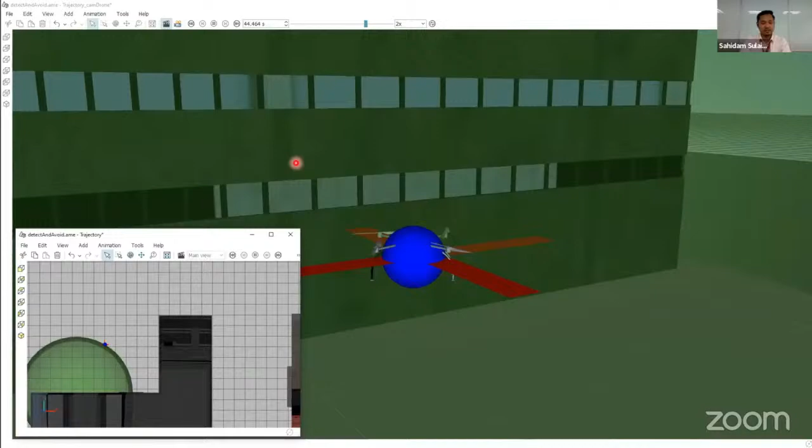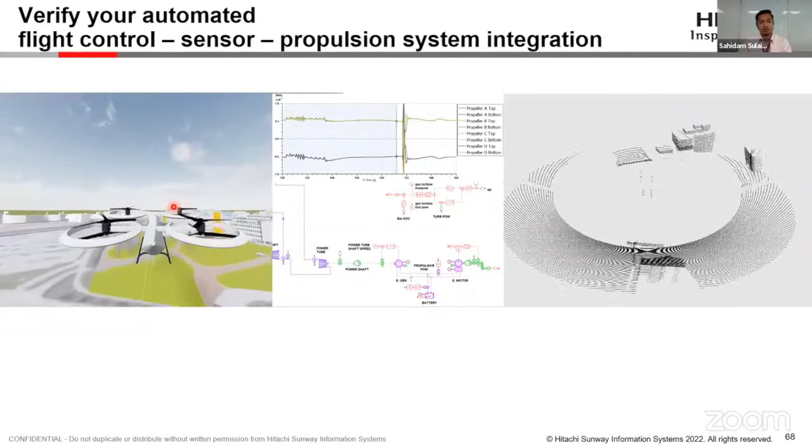Okay, so another example: the flight controls, sensors, and also propulsion system, you can do it inside the 1D simulation to verify, and then to put sensors for the controls. It avoids some of the obstacles by controlling the propeller speed, which propeller rotates, RPM, and so on. So these kinds of things can be done inside a system simulation, which is quite useful when you want to validate your drone design. Okay.

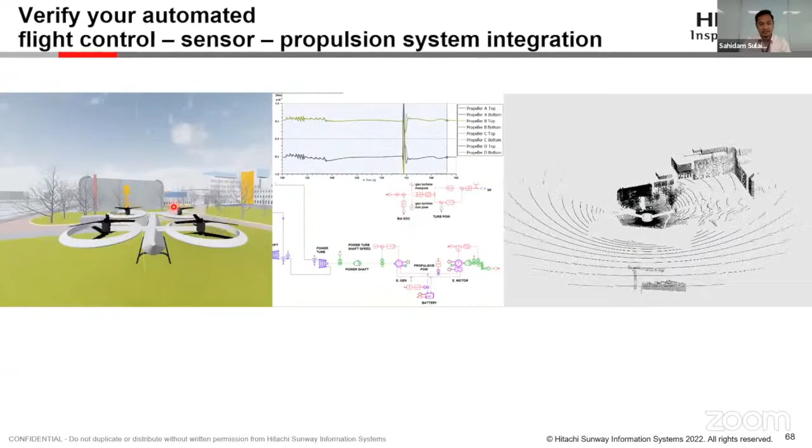Okay, so as a conclusion here, I would say that the simulation is not limited to the ones that I'm sharing with you today, like aerodynamic, acoustic, and also system. It can go further than that. For the structure itself, if you want to have lightweight structures, then you can perform the optimization, the topology optimization. That's one of the tools to validate.

You can have the dynamic analysis of the rotating part. You can have a thermal analysis. Okay, so if you guys are interested in that, maybe we can have another session for that. For this session itself, we have to make sure that we go faster and innovate more. We need to become innovative. So we need to use all the benefits from the simulation tools to overcome all the challenges that we have.

Okay, and then with this tool, we can become more flexible. If you remember how the design exploration tools will help you choose the best design for your drone. And also you can minimize the risk, because this is totally unmanned. If you are talking about deliveries, you can minimize the risk of the crash, the comfort, and then you can model all the complexity using the simulation.